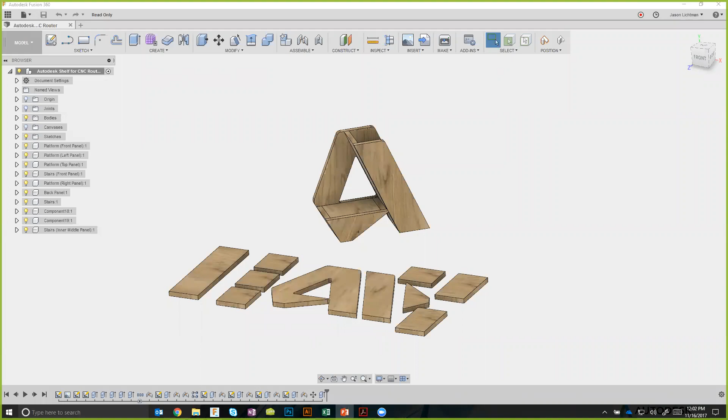So first thing we're going to do today is, hold on, that's wrong. Let's start this again. Hold on, glitch right here. One moment. Okay, let's start this all over again.

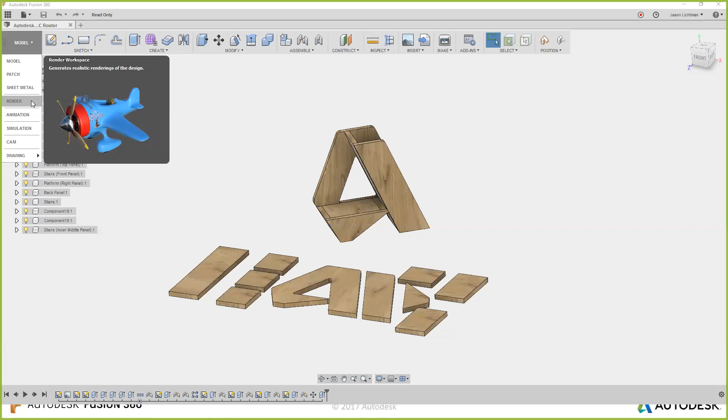Animation is where you can make videos showing the part itself running, moving around the screen, or if you have an assembly, things exploding or being assembled. Simulation is where you can test whether a part will break or not when you bend it, smush it, or smash it—all of those kinds of things.

CAM is where we go if you want to make tool paths for CNC machining. We also have the ability to make toolpaths for water jet cutting and laser cutting, but there are other ways I'd recommend that I think are even better for the Glowforge in particular—we'll address those in future webinars.

I'm not actually going to be talking very much about exporting files today. This is going to be a 6-part series, and I want to make sure to address each topic one by one really well, so that once you've watched all 6, you'll have all the tools and knowledge you need to get out there and make really great things.

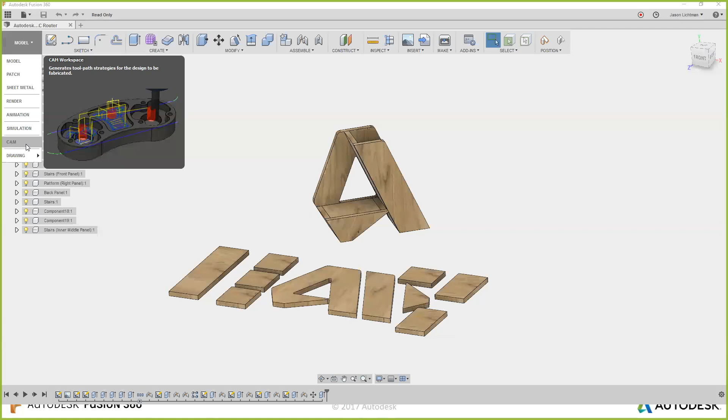Last thing is 2D drawings. Our 2D drawing environment will literally make manufacturing drawings, and again, for your Glowforge, I don't think it might be the most useful. We're going to focus primarily on modeling.

So once you're in the modeling environment, here's what I want you to pay attention to. The left side is where you're going to see all of your different components or parts. You'll also have folders for things like bodies, canvases—which are basically images you bring in for the background—sketches, which are all the sketches you draw, and below that, all of those components we talked about.

Down below is what we call the timeline, and the timeline is really helpful. This is where I'll introduce what we call parametric CAD. Parametric CAD is when you take a sketch and use it to make other 3D geometry, and you can always go back and edit your sketch.

This part here, for example, was created in all of these steps. These sketches were made, this image was brought in, this sketch was made, another sketch was made, then those sketches were turned into 3D things, and then more was done. I can reorder any of these and change the result that ensues, and I can also go back in time and see what things looked like by going back in the timeline.

I'll go over that in more detail. I know that right now that might not make any sense to you, so let's go and start making something, and I think this will make more sense.

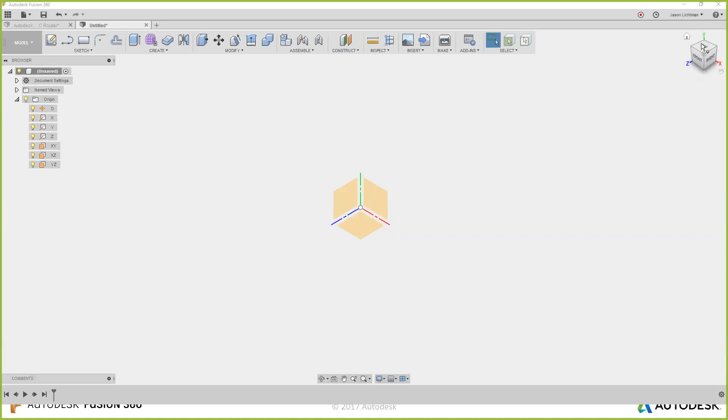If you're ever unsure which one is which, you can look in this upper right corner, what we call our view cube. If I click on front, it'll show me a front view, and now I can see this front plane perfectly face on. If I clicked on right view, I would look at this from the right.

I'm going to switch back to my other example, and this will make more sense. Again, if I click the front view, now I'm looking at this from the front. If I rotate this slightly and click on the right view, now I'm looking at it from the right, and the same thing is true from the top.

If you ever don't like the view that you're seeing and you want to rotate it, come back over here—we have these little arrows that you can use to easily switch to different views and different angles and things like that. I hope that makes sense.

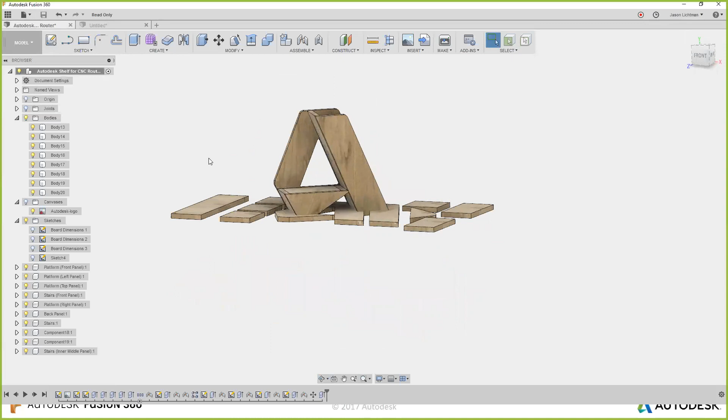So we're going to go and create a new sketch. To make our new sketch, I'm going to pick the front view.

The first thing I'm going to do is right-click and say Create Sketch. Now, ultimately, I think you all are going to be making your products in a Glowforge, so the first thing I actually want to do is create a workspace that represents the bed of the Glowforge. This way I know the scale of what I can fit and where.

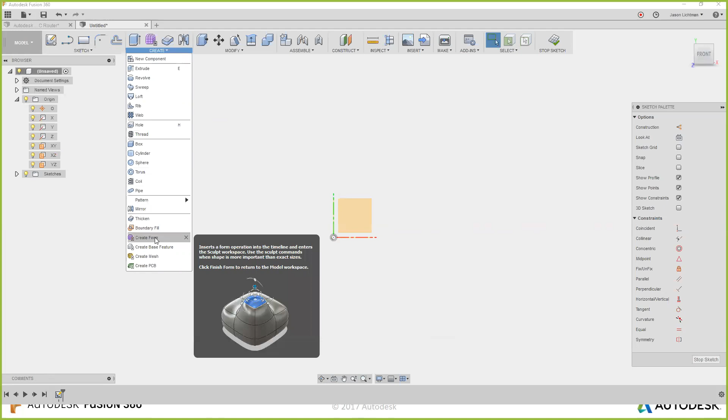I'm going to go into my Sketch dropdown. This is where you're going to find all of their tools for sketching. So if you're talking about 2D stuff, you're talking about sketching, and you're going to be in this dropdown right here. Later on, when we get into 3D stuff, we're going to create 3D geometry right over here in this dropdown. And then once we've created 3D geometry and we want to modify it, then we're going to go under Modify and use those tools.

It can go a little bit more complex as you go to the right, but we're going to start here under Sketch. I'm going to choose that I want to make a rectangle, and I choose that one right there. Now, I want the top left corner of my rectangle to be coincident, which is the word for in the same place as the origin of my 3D world. I'm going to pull out a rectangle and say OK. So now I have a rectangle.

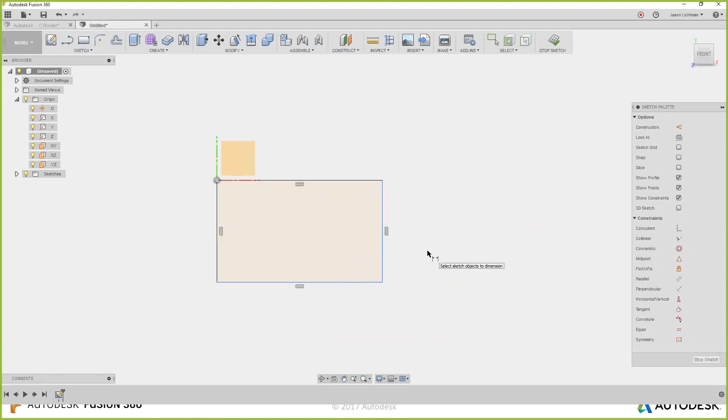Let's put some dimensions on this because I wanted to match the Glowforge. So I click the letter D on my keyboard, and my icon actually changed to something that has a little measuring thing on it. If I hit escape, it'll go away. So let me try that again. I'm going to hit D and now it looks like I have that icon. And if you don't know the shortcut and you haven't memorized it, you could also go under Sketch and then drop down to Sketch Dimension, and you get the same result.

Now I'm going to click on this line here. I'm going to move my mouse up and click again. And now I have a dimension. Now, I personally work in metric all the time, but just because I'm working in metric doesn't mean I can't put in imperial units. So I believe the bed on the Glowforge is 19.5 inches. So I type in 19.5 IN and hit enter. And notice that my rectangle became way bigger.

So let's zoom out a little bit. Now I have a much bigger rectangle. Let's put another dimension on here. I'm going to go here and say that I want the height to be 11 inches. Type in 11 IN, hit enter. And now I have a rectangle that represents my Glowforge perfectly.

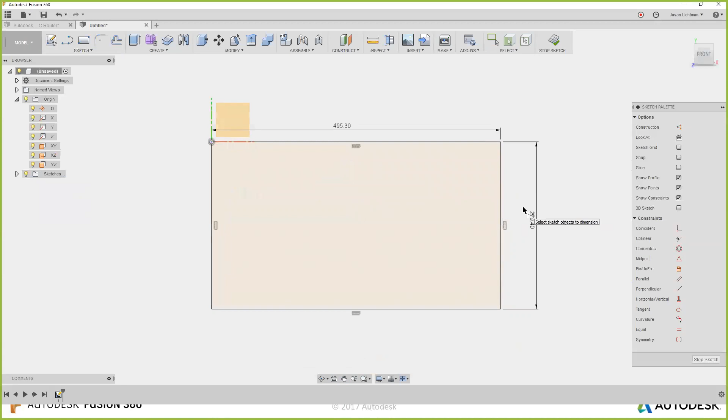So I'm going to hit stop. And what you're going to see in my timeline is that I created a sketch, and it's called Sketch 1. If I ever want to change that, I can right-click on it and say rename, and I'm going to change this to Glowforge bed.

Okay, now I don't want to get too far into the nitty-gritty on dimensioning and actually designing a product yet. The first thing I want to show you is conceptually why I think designing in a CAD program like Fusion is so awesome. So the first thing we're going to do is we're going to go over to another program that's very well known in the industry called Illustrator.

Here I have the same type of thing. I have my Glowforge bed set up as 19.5 inches wide by 11 inches tall, and I'm going to create a couple of rectangles. I'm going to create this rectangle here and this one.

Now we're going to go and make some changes to it. So I'm going to zoom in a little bit, and I'm going to click this rectangle, and I'm going to set some dimensions. Let's say for a second that the width of this rectangle is going to be 40 mm, and I hit enter. So that's the rectangle. And the height of this thing is going to be, I'll call it 20 mm.

Perfect. Now I'm going to take this one and let's set it to some different dimensions. This one's going to be, let's say, 80 mm, and then the height is going to be 60 mm. All right, perfect. So I have these two rectangles, and I'm going to move these so that they have a position relative to each other.

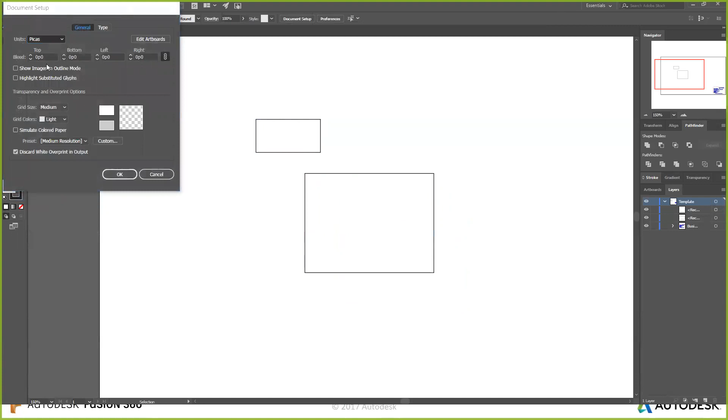So I'm going to change it to inches. Wait, no, sorry, I said the exact opposite of what I wanted. I'm going to change it to millimeters because I like to work in millimeters.

Now I want a spacing between these two rectangles. So the way I would do this in Illustrator is I'm going to click on this rectangle, go up to the top, and pick one of these three positions down below. I'll see what the position is of this rectangle, and in this case it's close to 90 millimeters, so I'm going to make it exactly 90.

Now if I want this rectangle to be 20 millimeters apart, it's kind of a pain. I have to come in here and say that the Y position of the bottom edge is 90. Now I'm going to take this rectangle and pick the top edge, and I want that to be 90 plus 20. So now the result is that the distance between these is 20, right?

And if I want, I can grab both of these together and move them together. But the challenge becomes when I want to make a change to the size of this box, it's not necessarily going to keep the distance the same.

If I am smart enough to pick this bottom edge again, and then I change my height, it is going to stay exactly the same. But if I had this in any other setting and I change my height, then you're going to see that the spacing changes. And that can be really frustrating.

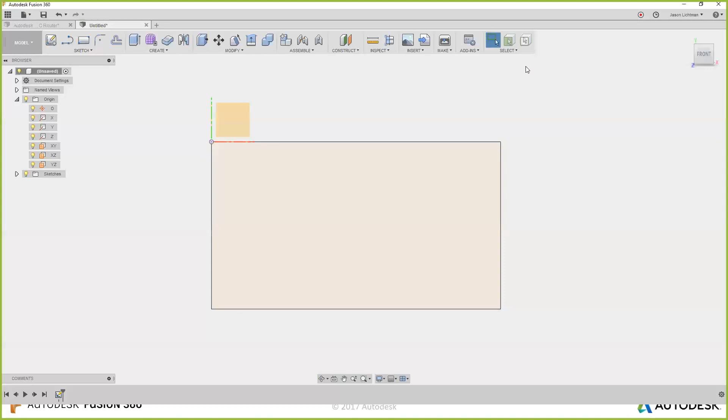But in a CAD program like Fusion 360, where we have what we call parametric modeling, it's all a little bit different. So let's try this again in Fusion.

So I'm going to make a rectangle, and I believe I'm going to try to do the same dimensions as before. So I think I did 40 wide and 20 tall. And notice this time it actually puts real dimensions on my rectangle.

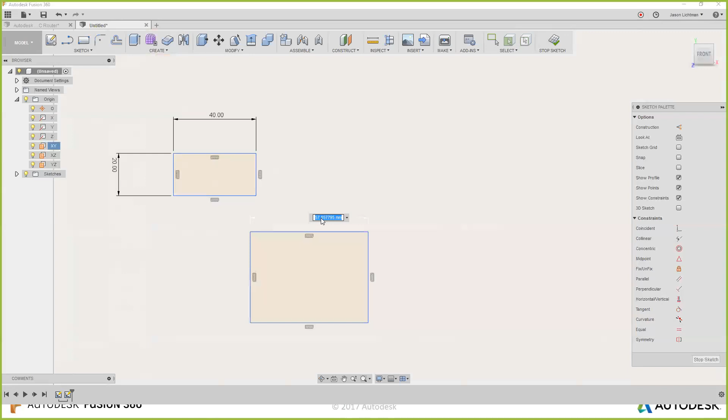And I'm going to make another rectangle, and I'm going to set these to be, I think this one was 80 wide and maybe 60 tall. And if I'm not exactly right, it doesn't really matter because my concept here is the same.

Because now I can put a dimension between these and say it's going to be 20. Now the cool part is, now that I've set my dimensions, I can take this thing and no matter where I drag it up and down, the other box is always going to come with it. And if, for example, I fix this one in space...

...and now I change the dimension here to something like 30, you're going to see that the box is going to change in size and height, but the relative position of one box to the other is always going to stay the same. And that's again because this CAD system is always going to know the relative position using those dimensions.

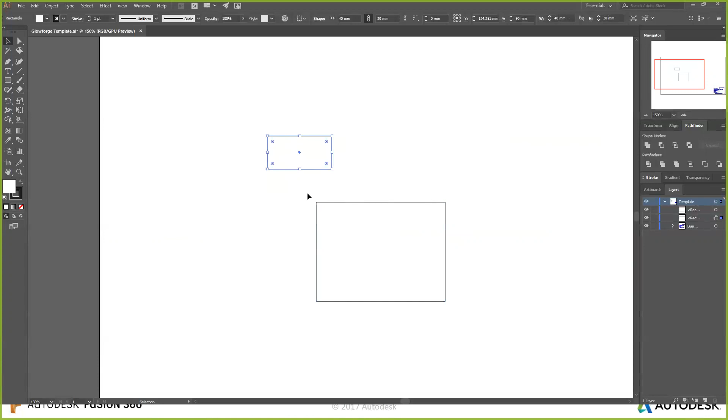So let's say I take this top box, and I want to make an offset, right? For example, maybe this is like a name badge, and I love this shape, and I want to make the name badge have like a score, just slightly offset from the exterior. I can come in here and say Object, Path, Offset, and I can preview it. So now you can see a preview.

And this time I want the preview to go inside, right? So we're going to change this to -2 millimeters, let's say. And now I can see an inside box.

But here's the catch. With a program like Illustrator, and I believe also Inkscape and CorelDRAW and some of the other vector 2D programs, if I now change the exterior box, whether I make it wider or I move it, the offset on the inside doesn't change. It stays exactly where it was. And that can be a problem because I want to be able to change my design and have everything update automatically.

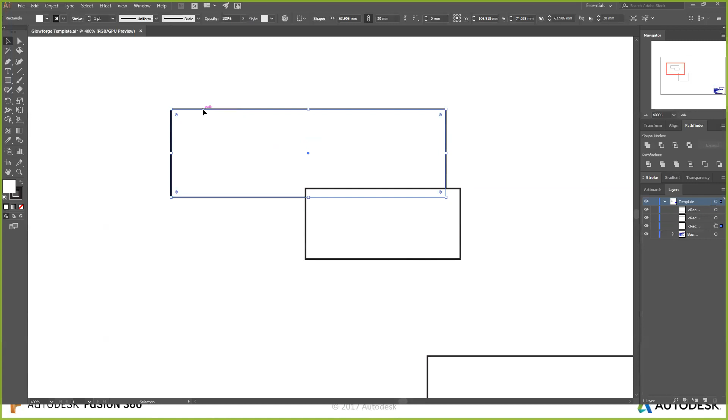That is the key to parametric design. So let's do the same thing in Fusion. I have this box right over here, and I'm going to go into Sketch, Offset, zoom in a little bit, and drag this in, and now I have it as 2 millimeters. If I move the exterior box, the inside goes with it. If I change the dimensions of the exterior box, the inside goes with it. Now, I don't want you to think that that's true only for simple boxes.

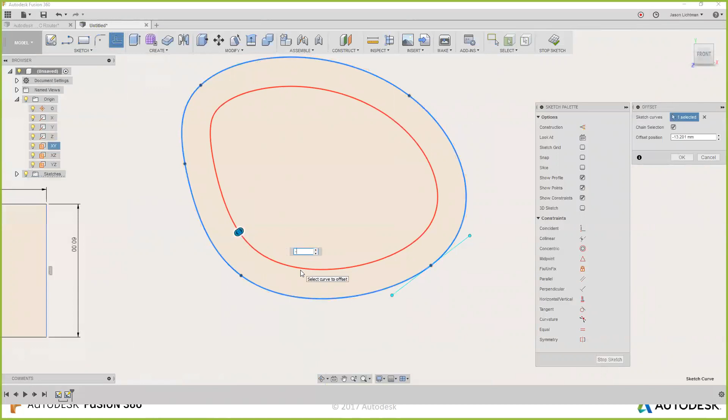Because I can make some pretty complicated geometry, I'm going to do this. It's called a spline, by the way, a math term for a complex shape that you can manipulate pretty crazy, like this. And I'm going to do the same kind of offset. I say Sketch, Offset, and drag this in by 10 millimeters. And even if I go and move the shape of my box, my blob really, everything on the offset is going to update too.

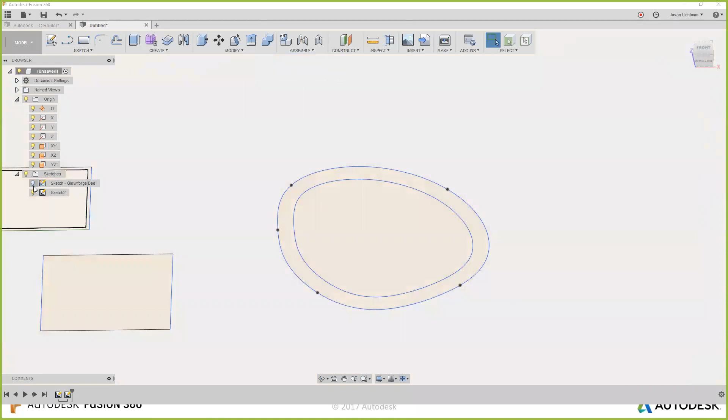Now the same is true for 3D as well. So if I take my 2D sketch and turn it into a 3D shape, hold on just a moment. I'm going to hide my Glowforge bed, there we go, now it's a little bit easier to pick stuff. If I make this shape into a 3D thing, I can go back and edit my original sketch and it's going to update the 3D as well. So not only is it going to update the shape of the outside, it's also going to update the inside. I could change this to 15 millimeters now, and when I say stop, the 3D shape updates also. That is really the power of parametric design.

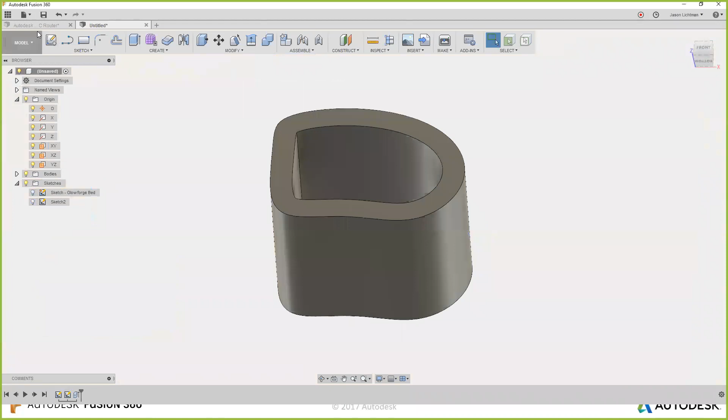And so in this case, it's really simple. I have a sketch for the Glowforge bed. Then I made a sketch for these rectangles and the shape, and then I turned it into a 3D thing. But just imagine for a moment that if you have a complicated thing like this, you can still go back and edit your sketches, and everything is going to update automatically. And that is really, really cool.

So I've been probably boring you on a little bit of this, so let's go and make something practical. I think you'll see this in action.

So I'm going to make a new design, and let's see what we're going to make. I went to a store the other day, I think Target or something, and I saw these plastic hangers that go on your closet, on the pole that holds all your clothes, and it divides different areas of your closet. And I thought to myself, even though I saw this and it was meant for the kids section, to divide long sleeve shirts versus short sleeve shirts, I thought for my coat closet, when you first get into my house, this thing would be absolutely perfect to divide my coat from my wife's coat, from my kid's coat, to maybe an area for my guests. So let's actually go and make that.

So I bought one of those things and put it in my scanner, and I now have an image of it. So I'm going to come in here and we're going to trace that image and use that to actually sketch and practice our sketching.

So I'm going to come in here under Insert, and I'm going to choose to insert a canvas. That's what we're calling a background image. So I pick that, and it's going to ask me where I want to put that image. I can choose, do I want to put it on the right plane, the front plane, or the top? This is arbitrary, it's your choice, and I'm going to choose to pick the front. So I pick the front plane, and now I get to pick my image. I'm going to go in under my laser cutting folder, and I have this thing called closetdivider.png.

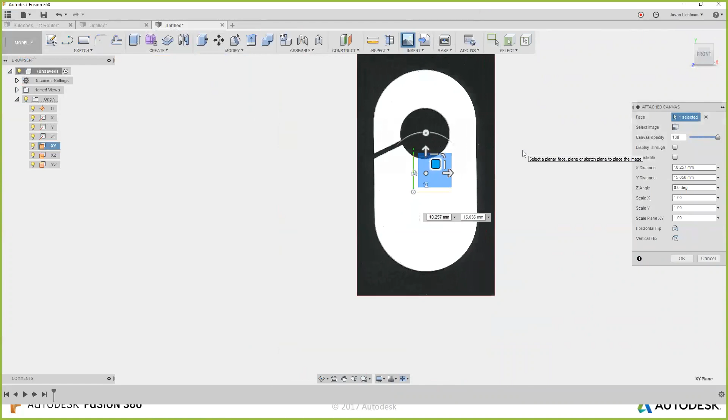Notice that it came in really small, so I can scale this thing and actually move it around. I could place this wherever I want. Let's look at this from the front view, by the way. Now this looks a lot cleaner. So I'm going to place this where it is right now. And now I have to decide for myself how big that image really should be. Now we have a really cool tool in Fusion that I love.

So if I go under Canvases, that's the folder here for all of my background images, I can right-click on my image and choose Calibrate. Here's how Calibrate works. I pick any two points, like the left side of this thing and the right side of this thing, and our software is going to automatically calculate the distance between it.

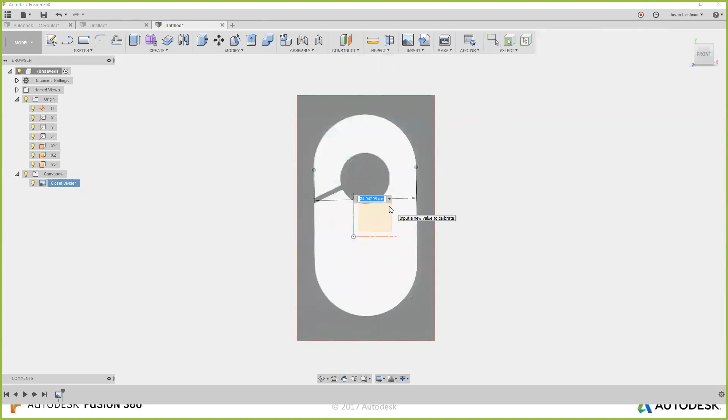Right now, the image happens to be 84 millimeters across those 2 points. And in this case, I measured my actual part, and it looks like I want it to be about 80 millimeters. If you're using Imperial, that's about 3.125 inches or 3 1/8. You could type that in as 3 1/8, or 3.125 IN would be the best way.

And so I type that in, and now it scales it to the right size. But now I want to place this in the right position.

So I'm going to right-click on this again and say Edit Canvas. And now I'm going to be able to move this thing into a new position. This doesn't have to be perfect. I'm really ballparking this, and it doesn't really matter how perfect it is. You could always adjust it later. But I'm trying to make it so that the origin, remember I said earlier, that's the center of my world, is the center of this circle, because I think that'll be convenient. But it doesn't really matter. I can sketch this no matter where it is. And I'm going to say OK.

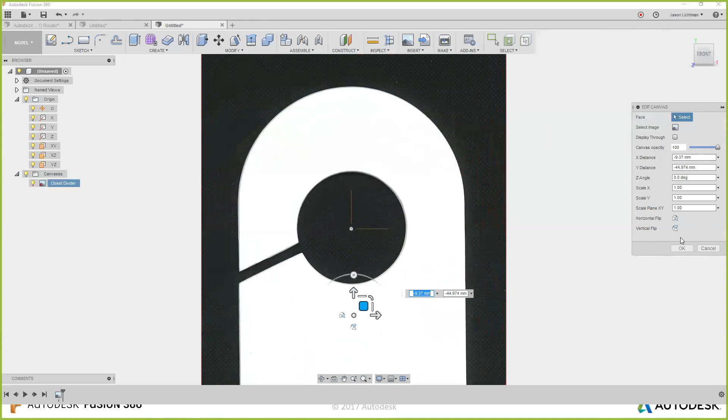Now I'm going to go and create a new sketch. Remember we talked about our timeline. It created a feature here called Canvas of Closet Divider. So now I'm going to go and pick the same face or the same plane, right-click and say Create Sketch, and we're going to make a new sketch.

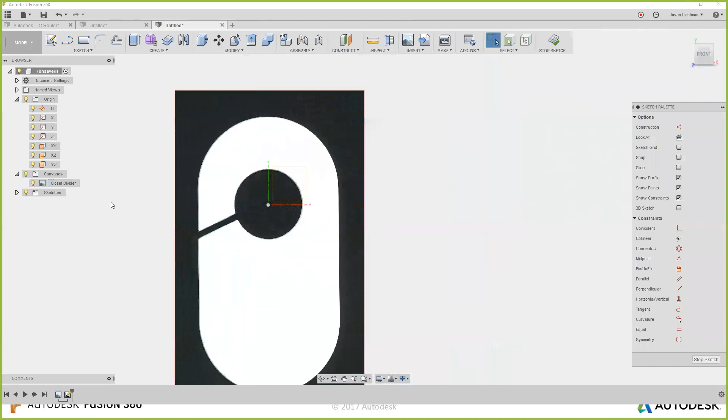Now here's where it gets really fun, because all I have to do is trace this thing. I can do it any number of ways, but I'm going to make this really simple for myself. I'm going to go under Sketch, Line, and click around here, then drag down, and then hit Escape.

Then I'm going to try again. I'm going to say Sketch, Line. I'm going to pick from here to here and hit Escape. So now I have 2 lines, and I could drag these anywhere I want. If I didn't put them in the right place, I can still move them a little bit. And I want you to notice there's a little icon on the right side of the line.

That icon is showing what we call a constraint. A constraint is saying, what kind of rules do you want to apply to this line? So do you want the line to always be vertical, or is it okay for it to not be? Well, this particular icon is the vertical/horizontal constraint.

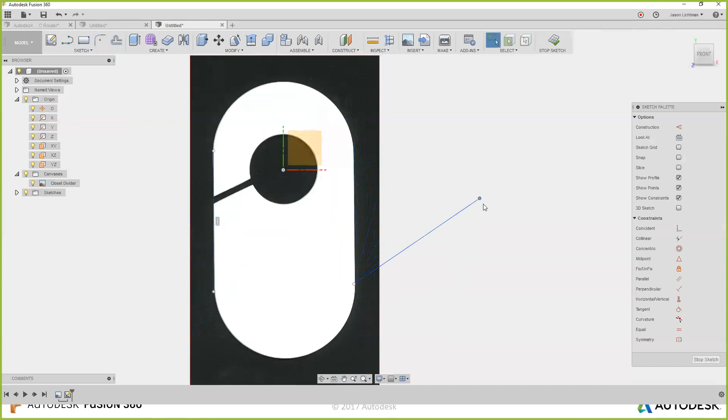So if I want to rotate this line, I can't right now. If I grab this thing and drag it, it's just going to move it. But if I get rid of that constraint, I can click it and hit delete. Now I actually can drag this thing and make it any angle I want. But in this case, I actually do like it that it was vertical, so I'm going to hit Control-Z and undo, and now I have my constraint again.

Then I'm going to go under Sketch and say I want to make an arc. I'm going to pick a 3-point arc. I'm going to start by clicking the first point, that's the end of one of the lines. Then I'm going to go to the other end and click there. And then I'm going to drag and click one more time. Notice that I'm already getting pretty close to the original design.

Oh, and I don't know if you guys noticed this, but over here, a new constraint popped up. A little thing that's a circle with a line next to it, and that's called a tangency constraint. That's basically saying that this line over here and this arc are tangent to one another, which basically just means smooth relative to each other.

And that's awesome. Now I'm noticing that my background image is a little dark, and I want to actually be able to fix that. So I'm going to hit Stop Sketch, and I'm going to go back here and right-click on my canvas and edit it. And I'm going to change my opacity down a little bit.

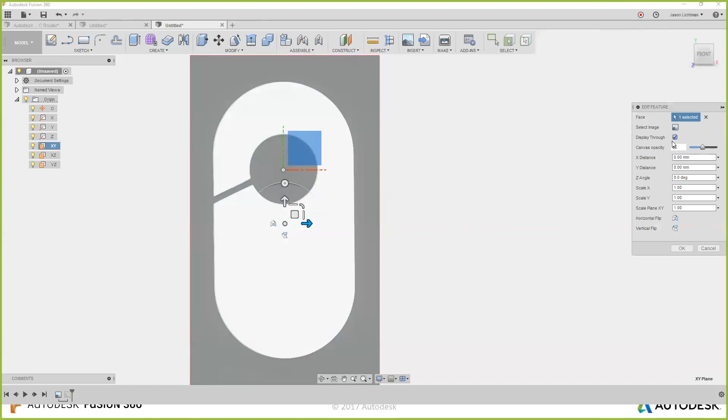And I'm going to also check this box here called Display Through. That means that when you make something 3D, you can actually see the image through your 3D thing at all times. I like it, I think it's really handy. So I turn that on and say OK. And now I'm going to go back and edit the sketch one more time.

I'm actually making these mistakes on purpose and going back and forth quite a bit because I want you to see how easy it is to go back and edit things.

Now I have a couple of questions that came in that I want to address. Dan asked, does the Calibrate Canvas tool have any option to snap placement points to portions of the imported image? The answer is no. Because when you select 2 points during calibration, it's really just 2 points that you're clicking with your mouse, and it doesn't know what the image is of. It doesn't know that it's a closet divider, a Lamborghini sketch, a hand sketch, or a Christmas ornament. It has no idea. So you're just visually placing, clicking in one spot and another, and it's measuring the distance between those 2 points.

In my case, when I wanted to measure the width to be about 80, I'm trying to make the second point about horizontal relative to the other. If I clicked 1 point up top and then 1 point down below, my measurement would be at an angle, and that wouldn't be really helpful.

So I imported my image, and I started to sketch on top of it, but we're not done here. I need to do the bottom, but I'm also noticing I don't have all the constraints I want. I have a really sharp edge between this arc and this line. So I can come in here and hold Control and pick the second line, then go into my sketch palette and choose what kind of constraints I want.

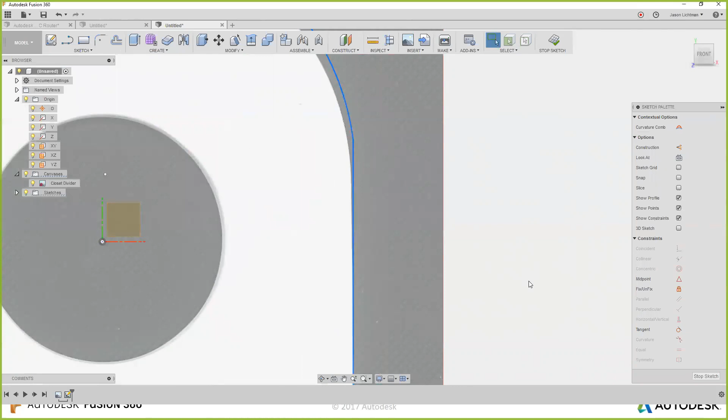Now I know none of you can talk in the audience, but think to yourself, what constraint do I want here? Here's a hint: on the left side, between this line and this arc, I wanted a tangency constraint. I'd probably want the same thing over here. So I'm going to pick tangent, and now an icon shows up, and you can see everything looks really smooth, which it didn't before.

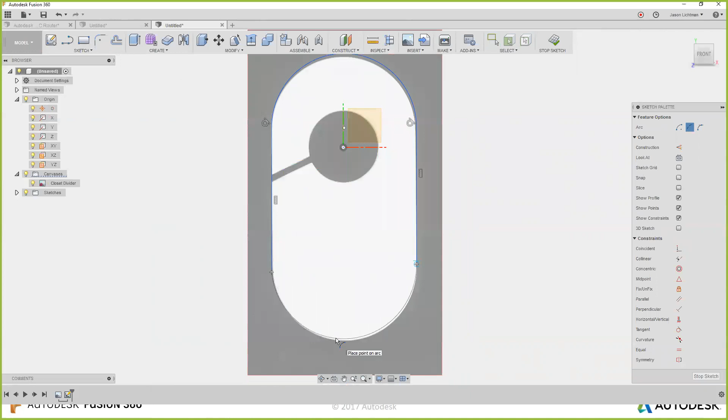Let's do this down below as well, then we'll clean it up and be ready to go. We'll go under Sketch and say I want a 3-point arc from here to here, or vice versa, it doesn't really matter. I'll drag it, and it looks pretty good. But we can clean this up - tangency automatically applied from this line to this one, but not here. So I'll choose those two, choose tangent, and now everything looks great.

But just like before, if I hide my original image, everything looks blue, which means I could drag this around and mess with it quite a bit. We want to apply some dimensions and constraints - we're going to apply both. A colleague of mine tells me you want to try to apply as many constraints as possible and then apply your dimensions, so we're going to follow that rule.

First thing I want to do is set a center line, because that might make my life a little easier. So I'll hit Sketch, Line, and go up to the top of my arc - you see that triangle that showed up at the top? That's telling me I just hovered over the exact center of my arc. That's perfect, exactly what I want. Now I'm going to drag down, intentionally dragging a little further than the bottom.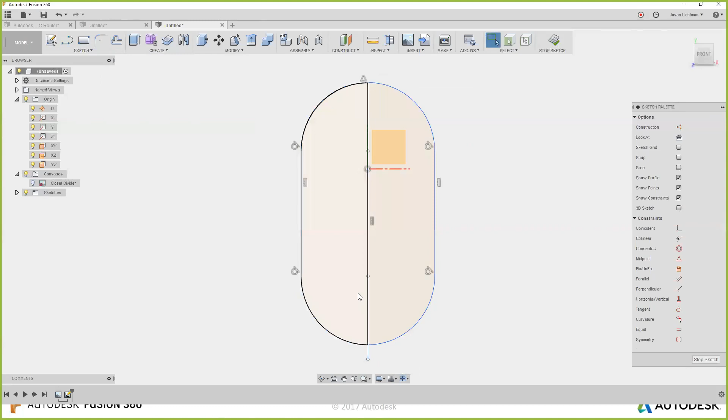You probably noticed this line I made is solid, like all the rest of them. Now that I put a line here, I can hover over 2 different areas of my closet divider thing, but I don't want to split it in 2. I want this line in the middle to just be a center line. In Fusion, we call center lines construction lines, and we show them as dotted lines. So I'll click on this and go over here to construction.

I'm going to show you that a little bit clearer with that blinking thing. I hit construction, and now it turns into dotted. When I hover over this thing, I only get to see the entire thing. That's perfect, that's exactly what I want.

Now I do want to trim this. You see how it extends a little bit past? So let me introduce a new tool called the Trim tool. I go under Sketch, Trim, and I can just pick here, and the red highlighting is previewing what's going to disappear, and it deletes it. Perfect. So now I have a center line, but I could still move this thing around, right?

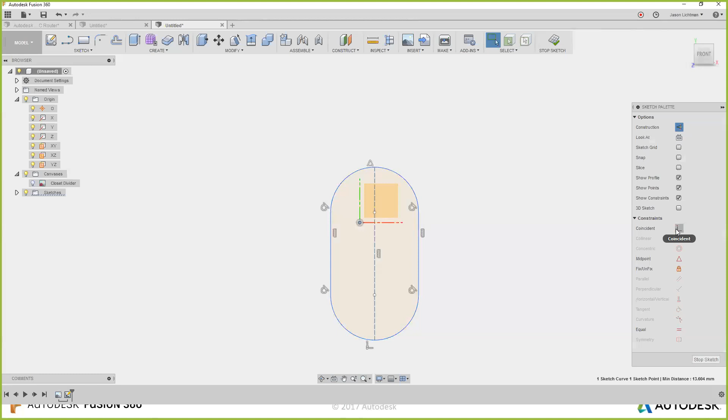So let's go, I click on the center line, I click on the origin. I'm holding Control in between, by the way, I forgot to mention that. So I select both of them at the same time, and I'm going to choose coincident. Think to yourself, what's happening now? I told you earlier that coincident means they're going to be on top of each other. If I highlight the line and the origin and choose coincident, my...

...sketch is going to immediately snap to that center line. So that's perfect. Now I can't move the center anymore left to right. I could still move it up and down.

Let's lock down the width, right? Right now I can move this thing left to right quite a bit. I can drag this thing and change the dimension. But I told you that I measured my actual closet divider and it was going to be 80 millimeters. So I can come in here, choose those two lines and set it to 80. Now, if I hide my canvas, notice that the lines on the side now turn black. They turn black because I can no longer drag them left or right anymore, because those lines are locked in place based on the constraints of this dotted line and the dimension.

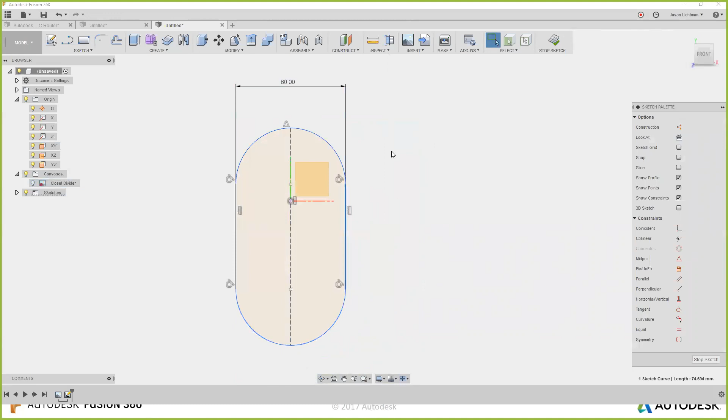That's pretty darn awesome. Let's do the same thing with the overall height. I'm going to click on the very top and the very bottom, and I'm going to drag this out. I measured my real part, and it was 152 millimeters. So now I have that locked. But it shows as blue, because I can still move this up and down.

So let's look at my origin, and let's drag this, and I'm noticing that the center of my origin, which lines up with the circle, also lines up with the center of this circle. So if I drag that center of the circle of this arc to the origin and let go, it's going to snap in place. And I know it's going to do that because there's a tiny little blue box that hovers around my origin when I hover near it.

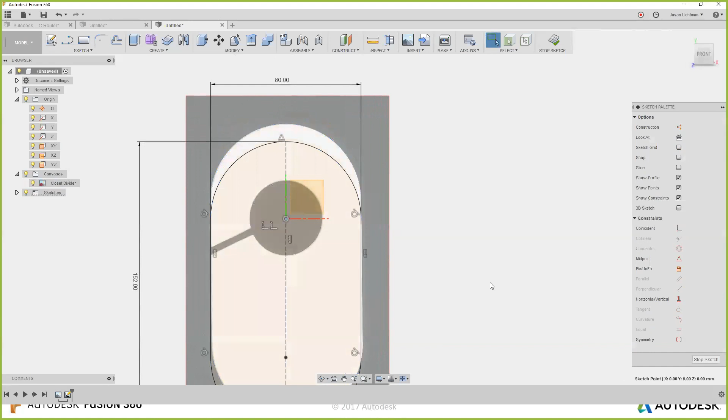Now that was really small, so I'm going to try that again. I'm going to hit Control Z to undo. Let's zoom in and see if you could see it better. I pick the center of my arc, and when I come near the origin, a little blue box shows up around my origin and lets me snap to it.

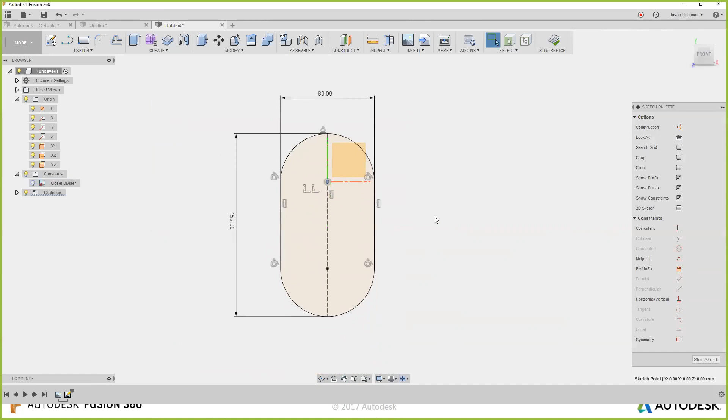And now that I've done that, here's what's so awesome: my entire shape actually turned black, and now I can't drag it anymore. I can change the dimensions though. If I wanted this to be bigger, or longer rather, I can do that. If I wanted this to be wider, I can do that. And it's really easy, all I do is change the dimension.

Let's go back and finish this off, right? Notice, by the way, that my image is totally misaligned, right? So let's go and we can actually move that around, and then the rest will be easier. I'm going to take my canvas, and move my image down just a little bit. There we go.

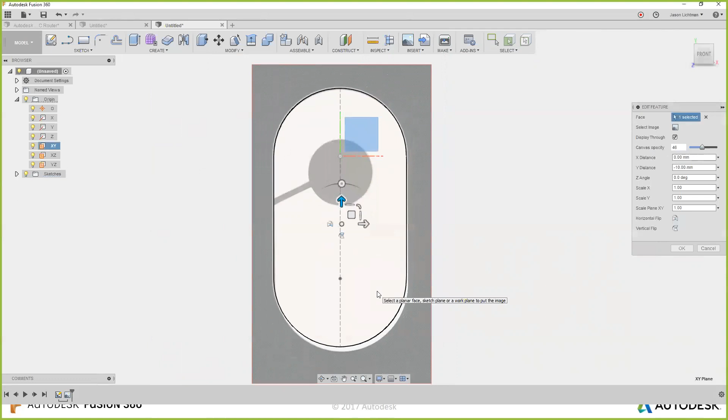And now it much more closely resembles the original. And it doesn't have to be perfect, right? Because ultimately, this is my design, it doesn't have to be anyone else's. I'm just using the scan as a background example so that I know where I want to end up. So I have everything looking good.

And now I'm going to go and edit my sketch again, and let's put in that circle.

All right, so I'm going to put in my circle right over here. It doesn't have to be exactly perfect, but I measured the real one, so I'm going to put in a dimension here. I'm going to click on this circle, pull a dimension, and I measured 38 millimeters. So there I have it. Showing my canvas, and this is already looking really great.

But now maybe I want to set a distance between the top of the circle and the top of this part. Well, that's really easy for me to do. Right now, though, if I grab the circle and I grab the top, the measurement is automatically from the center of the circle to the top. But I want the top of the smaller circle, that is, to the top of the bigger one. So I'm going to need to add new geometry.

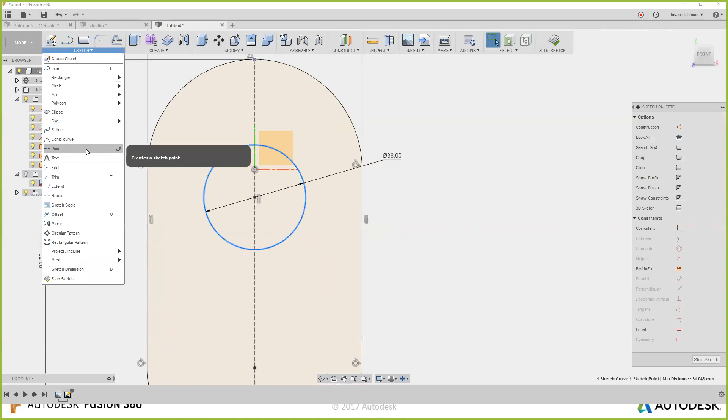So here I get to introduce a concept called points. I'm going to go under Sketch and add a point, and I'm going to put that point on the circle. I just dragged and clicked. And then I'm going to say I want this point to also be on my center line.

Now this thing is locked in to the top of the circle, but I can drag it. Now I can also click on the top of that point, which is the top of the circle, and this one, and come in and put a new dimension. Oops, I clicked wrong, let's try that again. 30. And now I have this thing looking really great.

Cool. We only have one more part left, and we can make it more detailed or we can move on to new things.

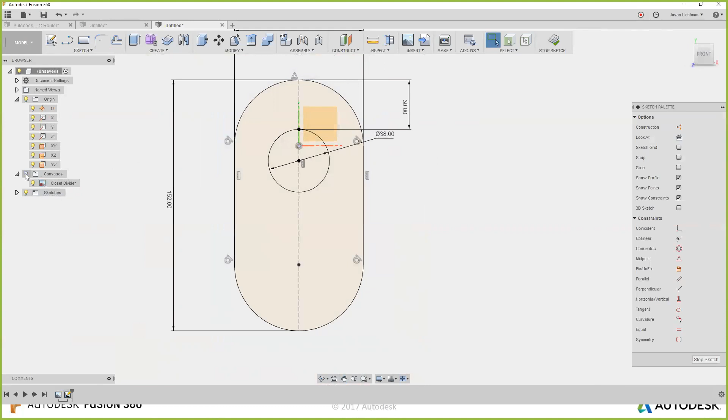And while you're answering that, I'll stay on this in the meantime. We only have one more section here. I'm going to add this little cutout. So for the cutout, I want to make two lines.

Now I have two ways to do that. I'm going to show you both ways so you guys know how to do it different ways. The first is I'm going to draw two lines. I click on Sketch, Line, and I'm going to put in a line like that. Notice I did not do a good job. That's totally fine. I'm going to draw another line, Sketch, Line, and this one is weird. I did a bad job, it doesn't match at all, but that's okay.

Because remember we talked all about constraints and how constraints force things into doing what you want them to do? So check this out. I'm going to pick this line, hold Control, and pick the second line. Then I'm going to go into my sketch palette, and I'm going to say I want these to be parallel to each other. And now they're automatically going to be parallel to one another.

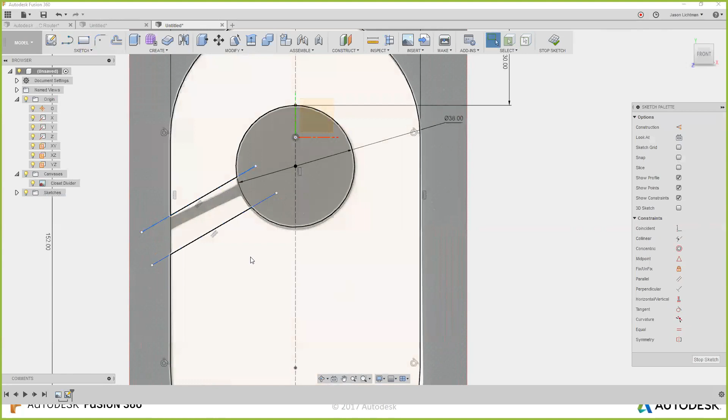The next thing I'm going to do is trim these a little bit. Because if I get rid of my canvas, you can see that I don't need this chunk over here. I don't need this chunk, I don't need that, and I don't need that.

So I'm going to say Sketch, Trim. Or notice I have this little shortcut, I could hit the letter T. So I'm going to hit the letter T on my keyboard. I'm going to pick this area. Again, the red is previewing what's going to disappear. Hit the red over here, hit the red over here, hit the red over here. And now I'm looking really good. Now, if I want to exit out of this tool, I hit the Escape key. And now I'm looking awesome.

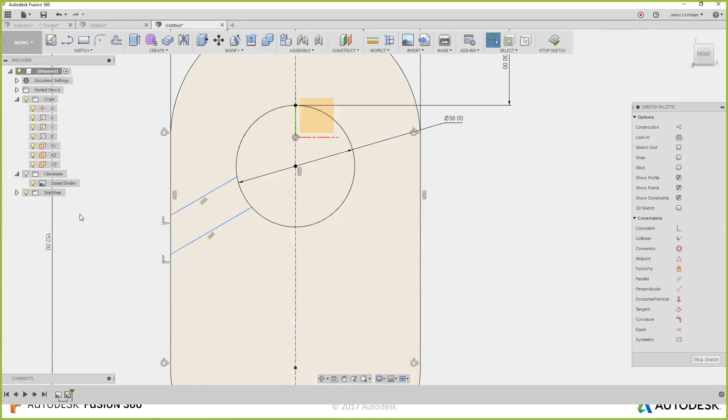Let's also start to realign this thing. So I'm going to move this thing over here, and I'm going to move this part. And it's still, notice, by the way, even when I grab these corners, it doesn't really change the angle too much, like sometimes it does. It kind of works a little weird. So I have a little trick for you.

I'm going to hit Control Z and undo that. Here's my trick: move one area of the line to where you like it, right-click on it and say Fixed. See how there's a lock button that says Fixed or Unfixed? Anything that's fixed in Fusion is going to turn green. So that point, I'm going to try to zoom in, it's not going to get very big, but there you go, it's green, and it's not going to move.

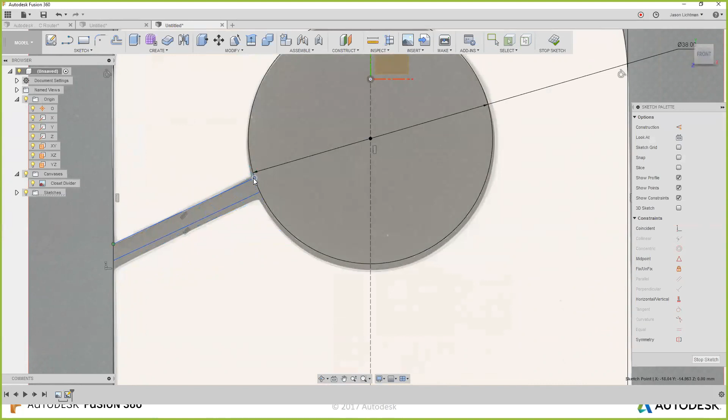And because that doesn't move, when I grab this other end, it's going to let me drag it a little bit easier to be wherever I want. There we go. So now that I have this one where I want, I could fix that one as well, but I actually like where this is.

I'm going to click on the original, right-click again, and unfix it, unlock it, and the green dot goes away. Now you're probably wondering why I bothered fixing it and then unfixing it.

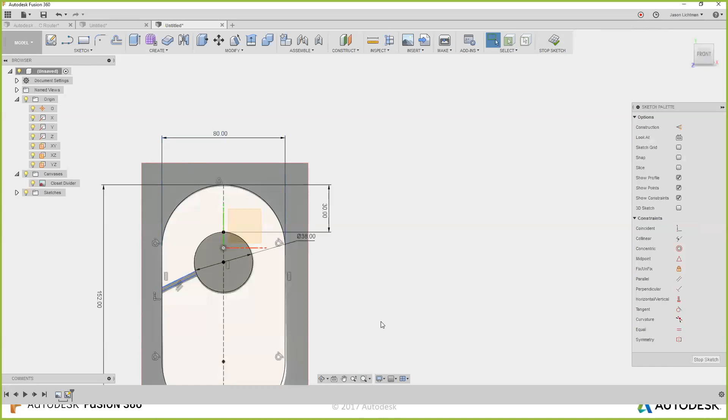I just wanted the positions to be kind of where I wanted, but here's the cool thing. I love the constraints and the dimensions. When you fix it in space, it really locks it in. If you change the dimension, like the width of this part, this thing is going to yell at you. You're going to get all these errors because that point was locked in space, and when I change the dimension here, it's trying to change something that can't be changed anymore. So they're going to fight each other. That's why I don't like to use fix or that locked-down mode for very long. I try to just use it for my setup. I hope that explains why I only use it temporarily.

So one of the ways I can make constraints here is I'm looking at this line and I'm seeing that it looks like it goes through the center of my circle. So I could pick this line, pick the center of the circle, and say coincident. Now when I move my line, it's always going to stay coincident with the middle. And it turns out I made a mistake, I was wrong about how the geometry worked out, so I'm going to undo that.

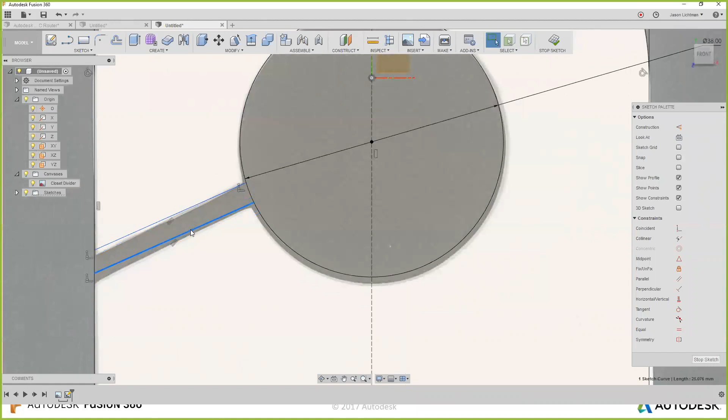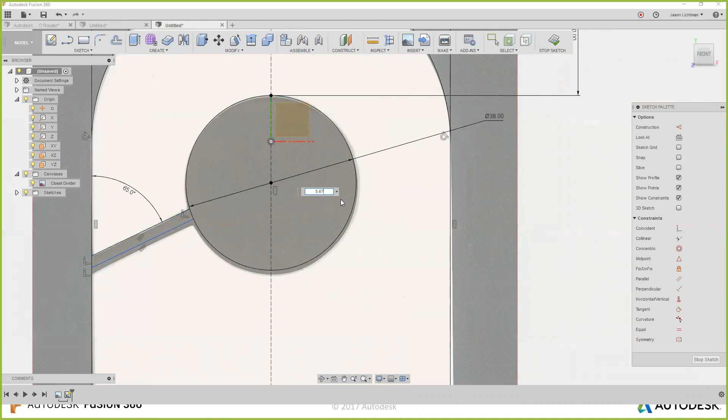We have unlimited undo, so you could just hit undo quite a few times. Let's see what we're going to do instead. We're going to dimension from this line to this one, and that makes an angle, and it looks like it's about 65 degrees. So I'll say that's cool. Then I'm going to make a distance maybe from here to here and say it's about 5.67. I like to get rid of a bunch of extra decimal places that I don't need.

And now actually I have everything locked down, right? It turns out that by dimensioning this point and this angle, that's all I need to figure out this geometry mathematically. So I don't need to do anything else.

Now you're probably noticing that what we've been doing so far is not very artistic, right? It is very math-based, and that's cool. Illustrator is really great at a little bit more of the artsy stuff. Fusion is even better at the more engineering stuff. It also does some of the artsy stuff, but you have to do it a little differently. Today I'm focusing on the engineering side, like these constraints and dimensions. But on other webinars, like webinar 2, 3, 4, 5, and 6, I'll show you the other ways to do it as well. But let's keep going for now because we're doing great.

I might have a dimension between this line and this line that I want to keep, because if I don't have that, then maybe this thing won't be flexible enough. So I put a dimension and measured the real one. The real one is 3.15 millimeters. And now I have that shape.

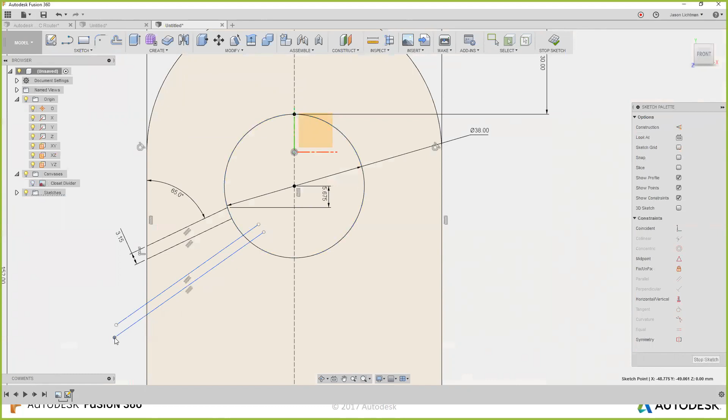Perfect. Now here you have two choices. By the way, another shortcut to do the same thing I did before, if I automatically wanted parallel lines and everything, is instead of drawing two separate lines, I could go under rectangle and choose a 3-point rectangle. I click point 1, point 2, and another, and it basically draws the same thing, in which case I would just delete the ends of it. I end up with two lines that are already parallel to each other. It's just a little shortcut in case that helps you guys.

So now that I have this geometry, let's go and turn this into a 3D thing, because that's what I've been talking about all along. This is where it gets awesome, turning a sketch into a 3D thing. Fusion 360 interprets your sketches and figures out what the profiles are. So based on what I sketched so far, I have 3 different options. I have this profile here that's highlighting in blue.

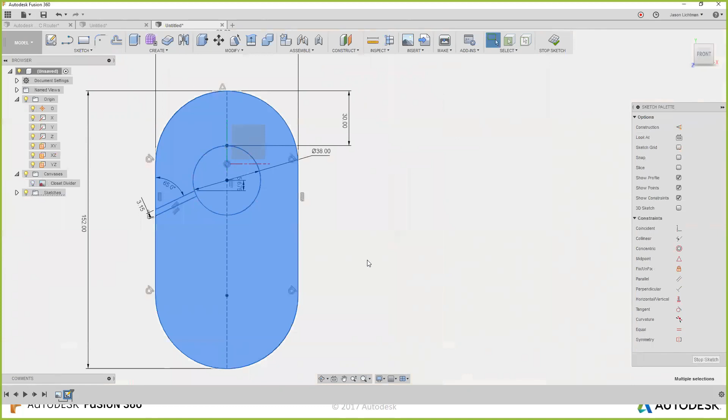I have a profile in the middle, and I have a profile over here. I can choose multiple of these at the same time if I want, including all 3. So I'm going to show you all the different options you get depending on what you pick. Right now I have all 3 picked, and I choose extrude, which is just an easy way to drag something in one direction to make it 3D. So I'll say OK, and this is the result.

But this isn't what I wanted, right? This isn't a coat hanger divider thing. So let's go back and edit it. I'm going to right click and say edit. And in my profile, you see how I chose 3 profiles? I'm going to hit X to delete them, and let's pick something else.

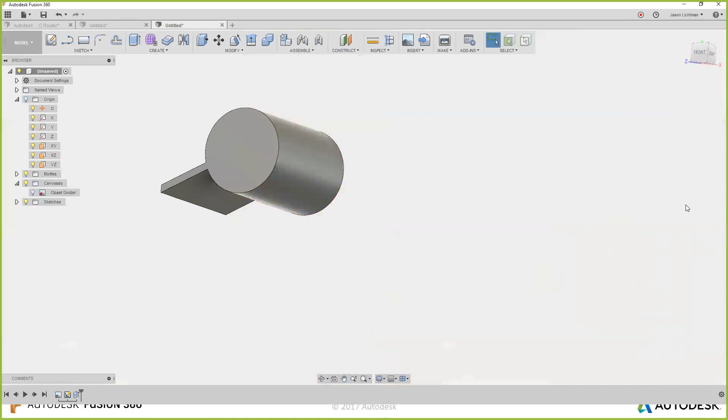If I pick just the circle, I'm going to end up with this. If instead I pick the circle and, let's try it again, hold Control and add this little sliver, I end up with that shape, right? And I'm going to do the opposite now, hit the X, and I want this shape. Now I have a coat hanger divider thing.

But this is way too thick, right? Clearly that's not going to work. At the very least, I'm not going to be able to bend it to put it on my coat rack. So I'm going to right click and say edit feature, and choose a thickness that's the thickness of my material, maybe 3 millimeters.

Now, by the way, this is going to be a shortcut for you guys for later. If you ever want to have this, if you're using the same thickness time and time again, here's a trick. Go under Modify, Change Parameters, and this is basically a parameter table. That's a fancy word for saying this is a list of dimensions you use all the time. I'm going to hit this green button, and I'm going to call this thing Proofgrade thickness.

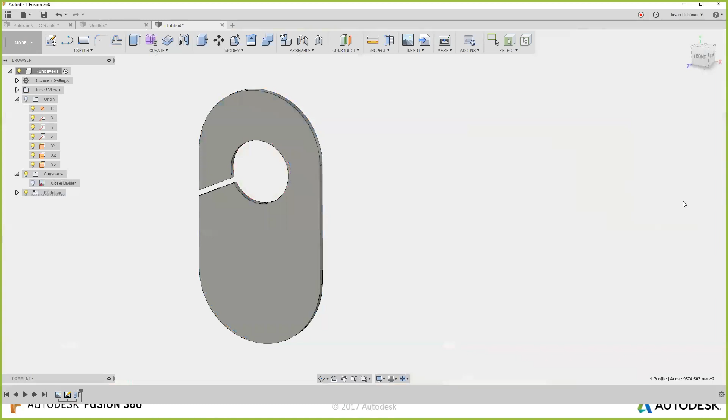And I'm going to type in the number 3 for 3 millimeters. So if everything I do in this model is 3 millimeters, instead of having to type in 3 every time, and if I want to edit my thickness, having to go find all the dimensions set to 3 and change them, instead I can come in here and type in Proofgrade thickness. Before I even typed in very much, I could see that dimension right here. What that means is that if I go back under Modify, Change Parameters, and change this to 5 millimeters, or I'll make it 50 just to really exaggerate this, now you can see that the 3D model updates also. So that's pretty cool.

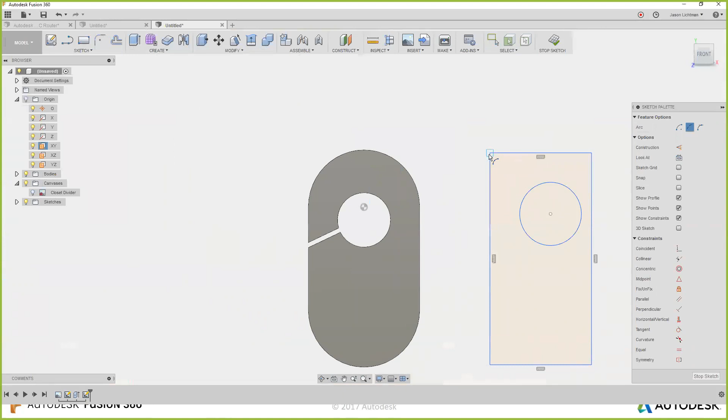So for example, if I made one coat hanger like this — by the way, I've been doing all of this slowly on purpose for the webinar, but if I wanted to do it really fast, I can do it like this. I'm going to pick another rectangle, make a circle, and notice how quickly you can take this and make it into geometry that's really usable to you. I'm doing this a slightly different way than before, just to show you that you can do things redundantly, and it all comes together really, really fast.

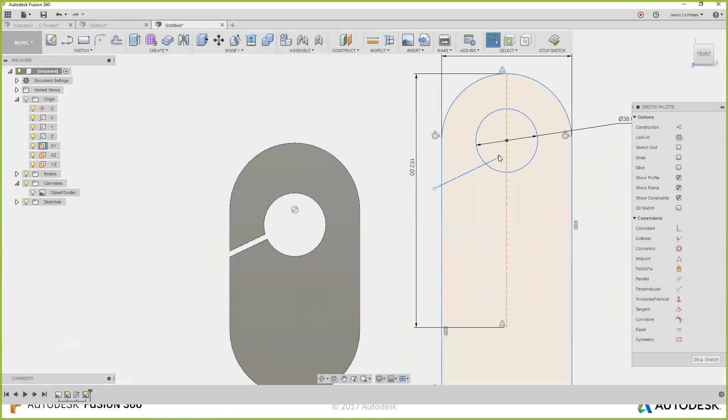Cool, so I'm going to stop this one and thicken this one as well. This is a slightly different one, of course, right? The dimensions are different. Again, I could type in any dimension I want, or I could type in Proofgrade thickness, and then it's automatically going to be the same thickness as the other. When I come in and change my parameter back to 3 millimeters, you'll see that they both change.

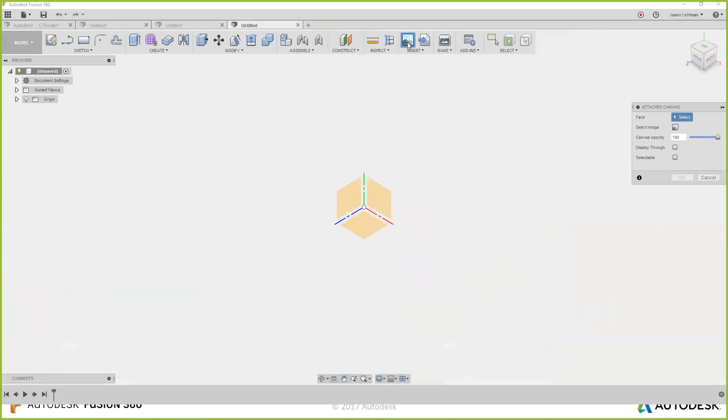Last thing I'm going to show you guys is how to do something more complicated. The first thing we're going to do is bring in the Glowforge logo and show how we're going to sketch that. So I'm going to make a new design, and just like before, I'm going to insert a canvas using the back face or the front plane.

I'm going to select an image that I downloaded of the Glowforge logo, check the display through, and reduce the opacity. I'm going to go into front view, zoom in quite a bit, go under my origin to the front plane and say create sketch.

We're going to do very similar to before. I'm going to create a line and drag it down vertically. This one is going to be the center line, so I'll hit the letter X for the construction symbol. I'm going to drag this over so it's in the middle, and now my origin and that line are going to lock together by the coincident feature.

Now I'm going to use circles because I could look at this logo, and to me, it's a lot of circles. So I'm going to start it about here, and drag it out, and move it down a little bit, and drag it out some more until it looks about right.

And now I'm going to set a dimension to this thing. It looks to me like the size of this circle is about 14.5. Good enough. I'm going to take the end of that line and this circle and set them to coincident, then drag this back down.

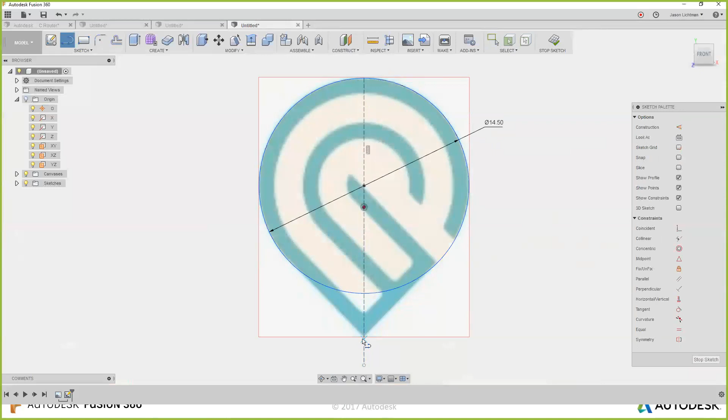There we go. And then I'm going to take a line, and start it right around here at the bottom of the logo, and drag it off over there. But just like before, I'm going to take this line and that circle and say I want them to be tangent to each other. That means they're going to touch each other right there.

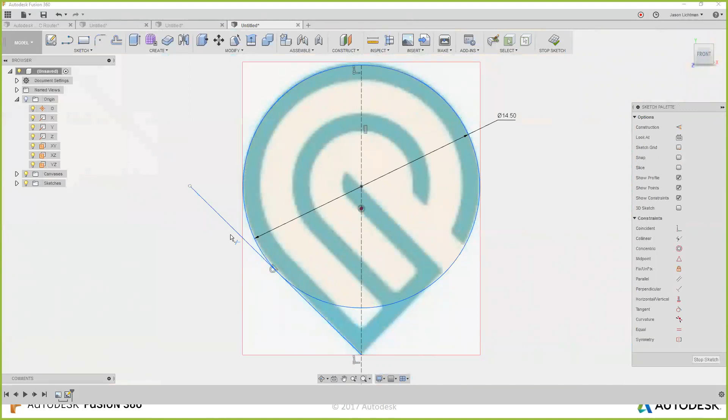Tangent. And then I'm going to go and trim the end of that line, because I want it to end right over there. Then I'm going to do the same thing on the other side.

I'm going to create a new line, drag it off into space, take that line and that circle, make them tangent. I could hit T for trim, and this time click right there. And then I could even trim the circle itself. Now I wound up with a teardrop shape, which is awesome.

By the way, I probably want a 90-degree angle between these parts. If I measure this, visually it looks like 90, and I see 92, so maybe I could just set this to 90 exactly. Now this thing is looking really good.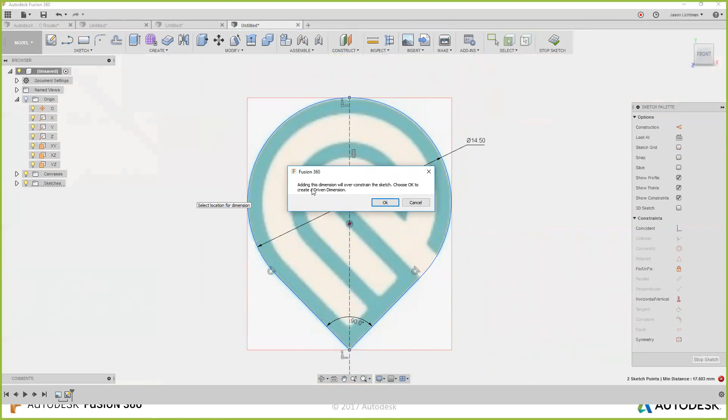I could even set a dimension for the entire size of this part, and it's yelling at me. It's saying that I already have all the dimensions I need to be able to put that in there. If I say cancel, no big deal, I move on. If I say okay, it's going to put a dimension with these parentheses on it.

And all that means is that when you change other dimensions, it's going to update this, but you can't double click on this and change it. That's all the driven dimension is telling you. But maybe I'm going to set a dimension from here to here. Oh, also that's over constraining it. So I'm just going to leave it for now.

Let's leave that. We're going to double click this entire thing and say I want to sketch offset, and I'm going to drag this in here, and it looks to me like this is about a 1 millimeter offset. So I say 1, enter.

I'm going to do the same thing again, and drag it over to here. This is about a 3 millimeter offset. I'm going to do it one more time, offset, and drag it all the way in, and this is about a 4 millimeter offset.

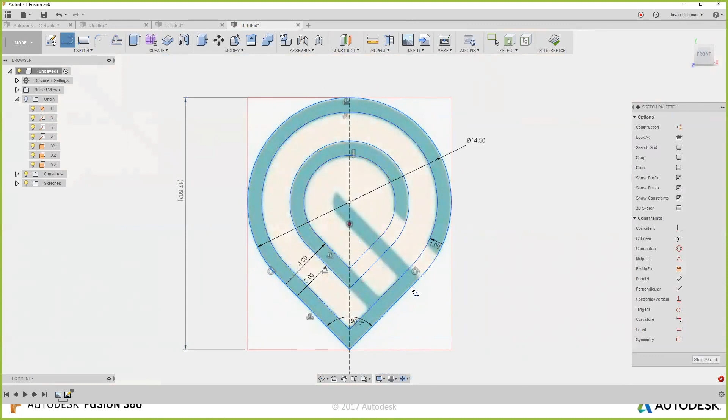And now I'm looking really good, really close, like I have my logo spot on to what it's supposed to be. I'm going to hit L for line, and drag a line from this area here to about there. And notice, by the way, that this line is so close to touching this origin that it's probably supposed to touch, right? Especially when you bring in images and you see dimensions are close to whole numbers, they're probably supposed to be.

If a line looks like it's matching, it's probably supposed to match, so I'm going to make that match. Then I'm going to take the whole line and offset it, and it looks like 1 millimeter gives me that other line. So that's awesome, let's see what else we could do.

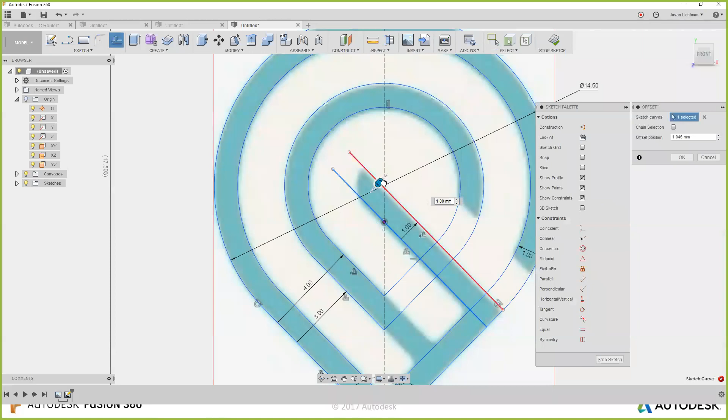I think I'm going to do another offset from here. Actually, I'm going to take this line and offset it. We're about there, and it looks like this should be about 3. Now I'm starting to get myself something really awesome. Not all of this is matching perfectly, so we're going to have to do some trimming.

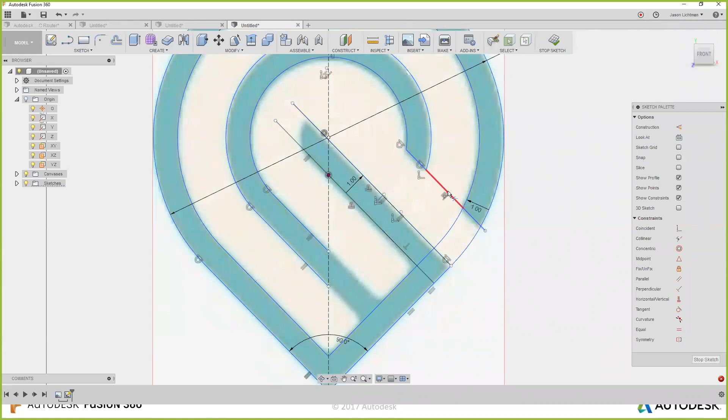Let's open the trim command, I hit the letter T again. I'm going to hit this one to make that go away, this one, this guy, this guy, that guy, here, here, and there, and it's already looking better. Let's keep going, trim this away, trim that away, and we're looking great now. Not perfect, but we're looking great.

Let's take these lines and extend them instead of trim them. So I go under Sketch, Extend, and now it's perfect. We're going to extend it one more time, but now I still have something here that I shouldn't. I'm going to trim that as well. Now that's looking great, let's clean up this area right here.

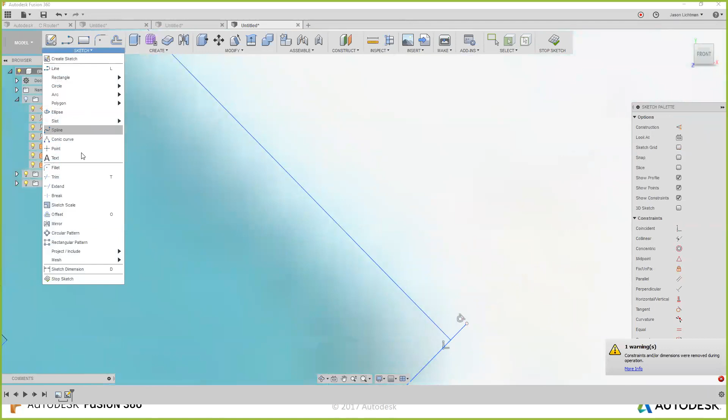Let's trim this away. We're going to extend this line to the end. I see something there that shouldn't be there, so let's actually go and trim that as well.

This is looking fantastic. Now I'm also seeing I probably should have this rounded, so let's put another circle here. I'm going to make a circle like this, and I'm seeing that this circle and this line are probably supposed to be tangent, so I make them tangent.

Now I can come in here and do a little bit more trimming, trim that away, trim this, trim that, trim this guy, and that guy, and now I'm looking really good.

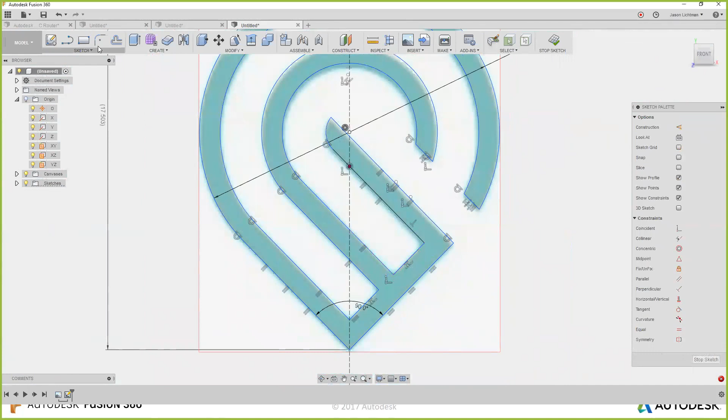One last thing, I believe on the real logo they have some rounded edges here as well. So I'm going to go and pick a fillet command that's under Sketch, fillet, and I'm going to pick this corner, this corner, this one, and this one. And that's looking great, hit enter.

I'm going to come in over here, and I think this is the very last fillet. I think this one should be size 1, that's too big, 0.5, perfect. And now I have, let's get rid of the canvas, a perfect Glowforge logo sketched from scratch, right?

And the key here is you see how inside the logo turns yellow, and when I highlight over it, there's like black edges? That means that it's a perfect profile, and I could use that to extrude into 3D shapes.

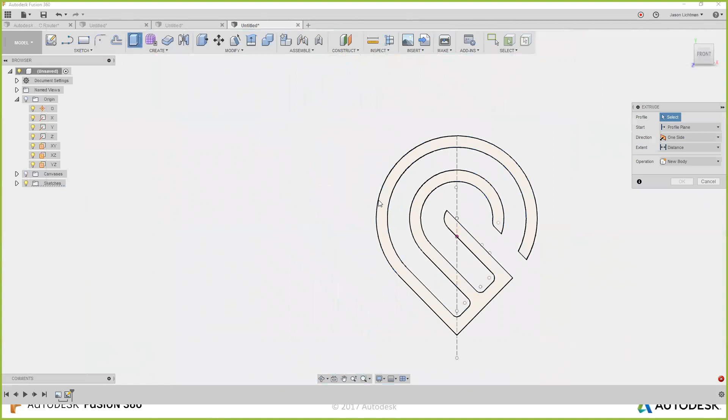So for example, I can turn this into a 3D thing like that, or conversely, I could actually go and create a new sketch of maybe a box. Maybe I'm going to make a box and have a Glowforge logo in the center. I can come in here and make a box.

Perfect, we're going to make a new body, and then I'm going to reorder things a little bit here. This is where it gets a little bit more advanced. So what I did was I made the logo, and then I made the logo extruded right into a 3D shape, then I made a box. But I told you earlier that we can reorder things in our timeline.

So I'm going to move the sketch of the box to be earlier in time, just literally drag it over to the left. I'm going to drag the extrude of the box over to the left. And now all that happened was I made a box and then the Glowforge logo. That's the only difference, right? I know it sounded all complicated, but that's the only difference.

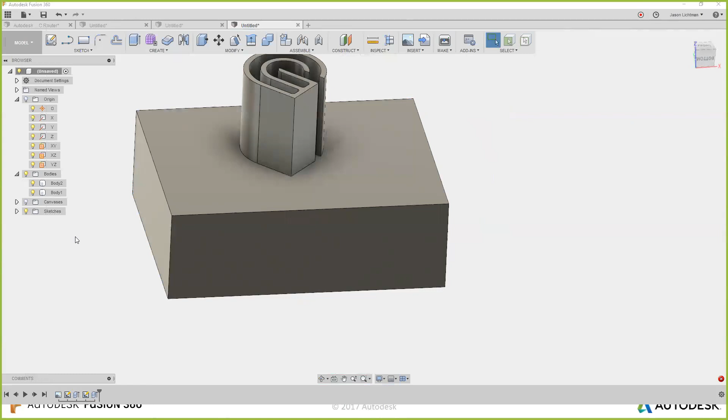But the benefit is that now, instead of making the Glowforge logo into a new shape, I can actually take this and go the other way and change this into a cut, and I can cut this Glowforge logo into my box. Does that make sense, everyone? I know you can't answer me directly, but I hope that makes sense.

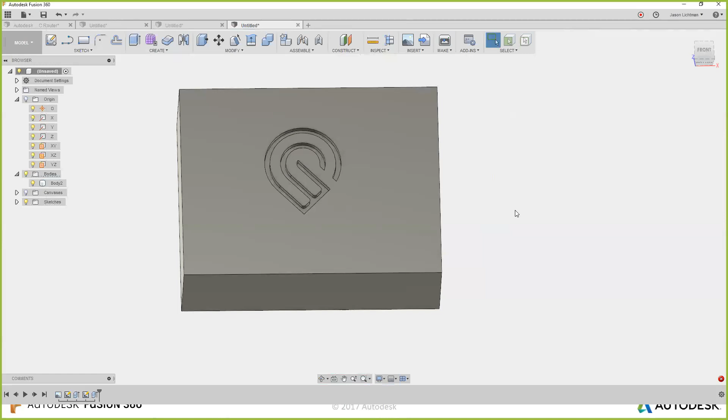Again, by being able to have a parametric CAD environment, being able to take step by step, make one thing, use it in another, you can actually come in here and make very complicated objects really quickly. So for example, I made myself a name badge, and I did that all in Fusion 360, and this is super simple, nothing really crazy here.

And I had the following steps. Let's go under the modeling environment. I made a sketch, show it, there we go. I made a sketch of my name badge.

Let's go forward in time. I turned it into a 3D name badge. I then moved that name badge to an angle so that it actually looks like it's at an angle. Then I went ahead and turned it into a component.

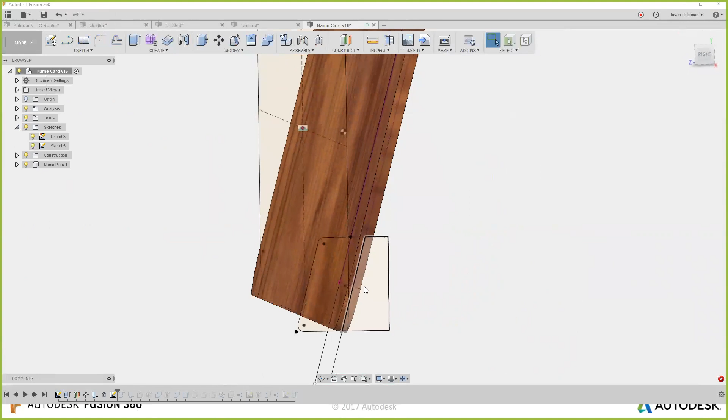I then made a sketch of a little thing that's going to hold it up in space. I take that thing and turn it into a 3D thing. You can go through the list, turn that into a component, simplify it, make it more complicated, and then suddenly you end up with a 3D thing that you can use to actually laser cut.

Now we're at the end of our hour. We went over a lot of information. Our focus today, if I look back at the agenda, was to give you an intro to Fusion 360, an intro to parametric CAD. Again, that's the ability to draw a sketch, turn it into a 3D thing, and then go back and edit the sketch, which then updates the 3D thing. That's pretty awesome, or to be able to update one piece of a sketch that updates all the rest. That's also pretty handy. Then we did a pretty deep dive into sketching.

Primarily using images to form the background for us to actually draw the sketch over. Now, we did not end up getting to our bonus. We did not end up going over vector import and export between Fusion 360 and Adobe Illustrator. I will make sure to cover that next time.

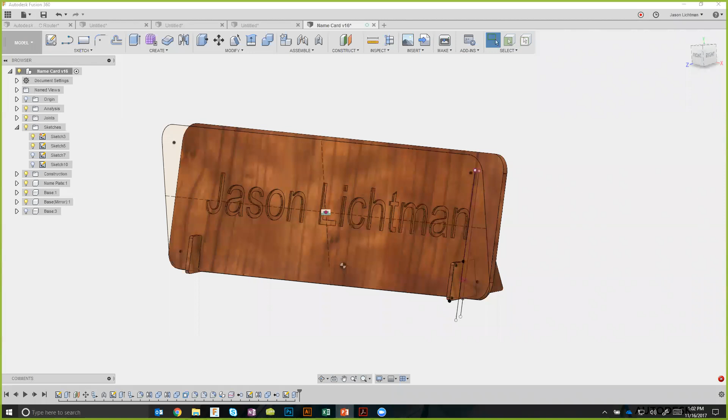So let's go over what we're going to see next time if you guys join us. Hold on, my PowerPoint is going a little crazy on me. Let's try this again. For webinar number 2, we're going to be going another deep dive into sketching. And again, the reason is because sketching is so important to being able to design in 3D. So I am going to spend a little bit more time on sketching itself, and we're going to turn our sketches into a 3D object that's stacked layers.

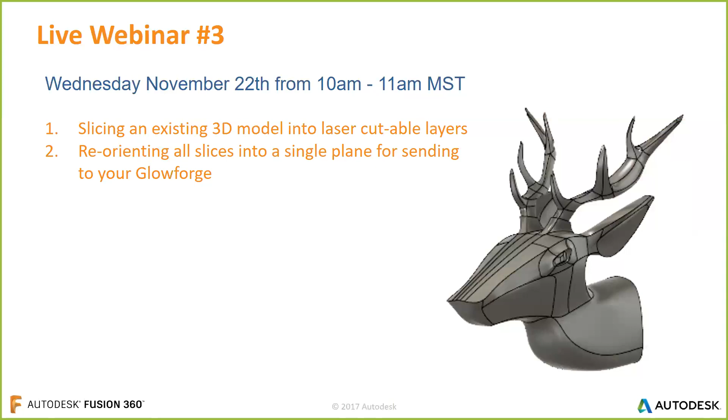Is it something that you would want to go back to? Whoa.